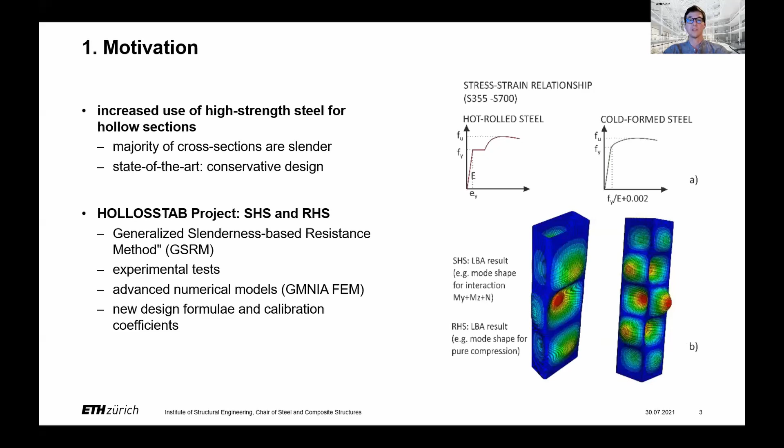as slender. Furthermore, most experts at the moment would agree that the state-of-the-art design formula according to the Eurocode for such cross-sections and high-strength materials combinations would be rather conservative and do not allow for utmost efficient and thus sustainable design. Before going into more detail, let's get some background on machine and deep learning.

So when does it make sense to use machine or deep learning in such a setting? I think that there have to be three necessary ingredients. One is that there has to be at least some pattern in the data for the effect we are searching for. We have data about the phenomenon, and the mathematics and theory is too complicated to capture it with a simple model. For the problem at hand, we would see that all three ingredients are fulfilled.

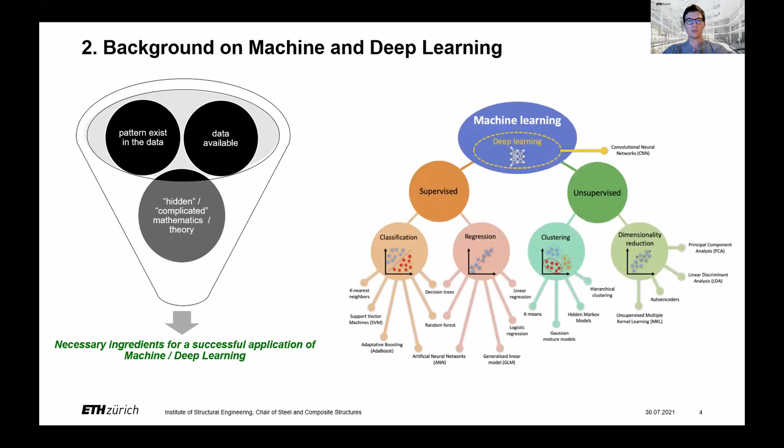As we are doing the prediction of a continuous variable, we would go into the branch of machine learning which is concerned with so-called supervised learning, as we have some inputs and some output variables. And as we are predicting a continuous variable, we would be in the branch of regression. And especially today, I want to present some results which we obtained for neural networks. And therefore, we are in what is called deep learning.

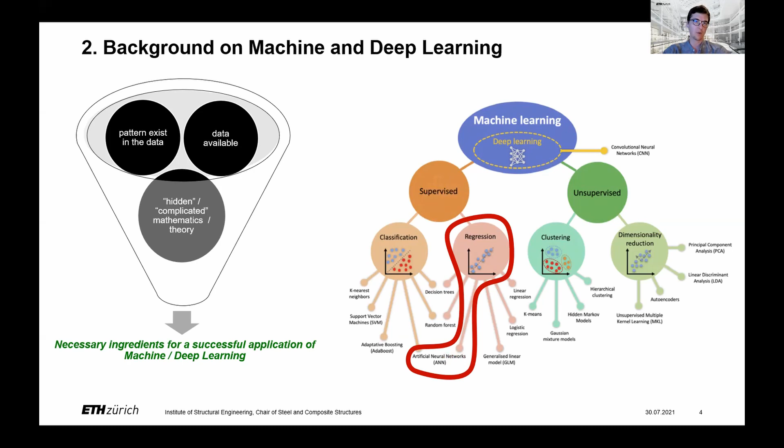So maybe one further note on the neural networks. As you can see, neural networks consist of at least three types of layers. The first one would be the input layer, which takes the features or input and hands it over to the so-called hidden layers, which, just as our brain, consist of some neurons, which take the signals from the layer before, process them in some nonlinear way, and hand them over to the next layer.

The third type of layer here is the so-called output layer or target layer, which consists of the variable which we want to predict in our case. So to sum up, a neural network is simply a composition of functions. Each neuron would take a weighted sum of the inputs from the previous layer, add a bias term, and put all that into a nonlinear activation function.

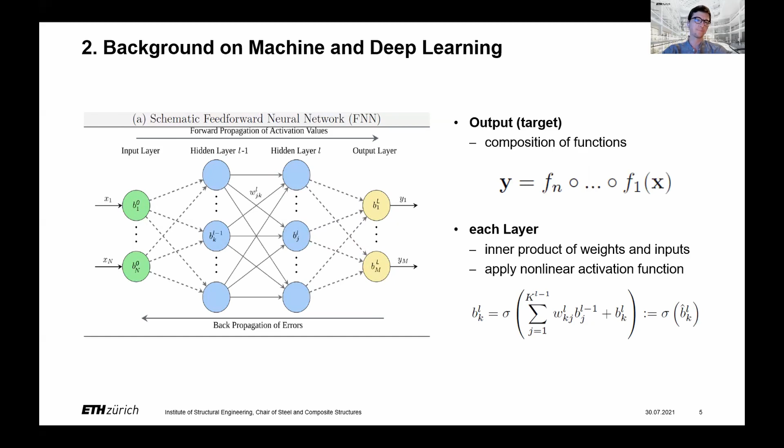So our database was generated based on experiments, but also finite element simulations within the HOLLOSSTAB project. And this serves as the basis for the validation of advanced numerical methods using geometrically and materially nonlinear finite element method analysis with imperfections, which in the following will be abbreviated GMNIA.

So in total, 104 full-scale tests on high-strength steels and mild steels on RHS and SHS and other custom-made sections with flat faces were conducted, plus a further 56 full-scale tests on HSS and mild steel CHS short members and beam columns were also carried out in a test facility in Munich.

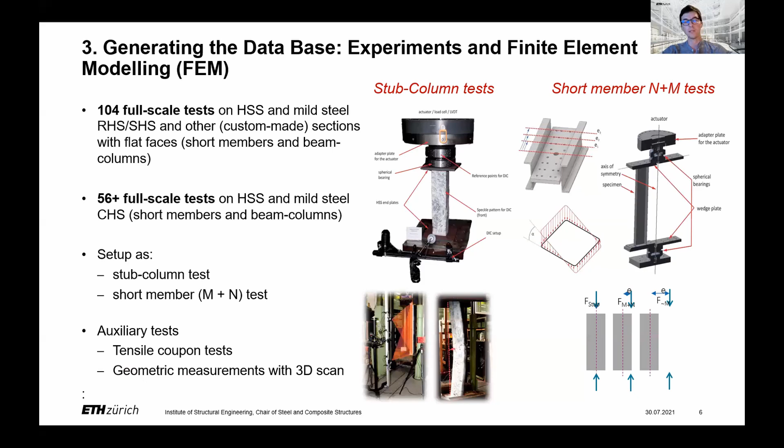The test setups were the stub column test, as you can see here on the left-hand side, and a short member test with bending and compression forces on the right-hand side. Some auxiliary tests were done on the material itself in terms of tensile coupon tests, but also some geometric measurements of the pre-deformed hollow section geometries before doing the tests. In addition to the physical tests, a bunch of numerical studies were conducted via the finite element method.

This consisted of two stages. In the first stage, there was a so-called GMNIA-MEAS, which used the measured deformed or imperfect geometry before conducting the test, and the finite element mesh was calibrated such that the peak load as well as the post-buckling deformation shape was met.

And then in the second step with the GMNIA, there were some simplifications with regards to the modeling of imperfections, but also material laws were applied. There are a lot of details on that end which I unfortunately have no time to go into. I would refer you to the papers of my colleagues, Dr. Toffolon and Professor Taras, in that respect.

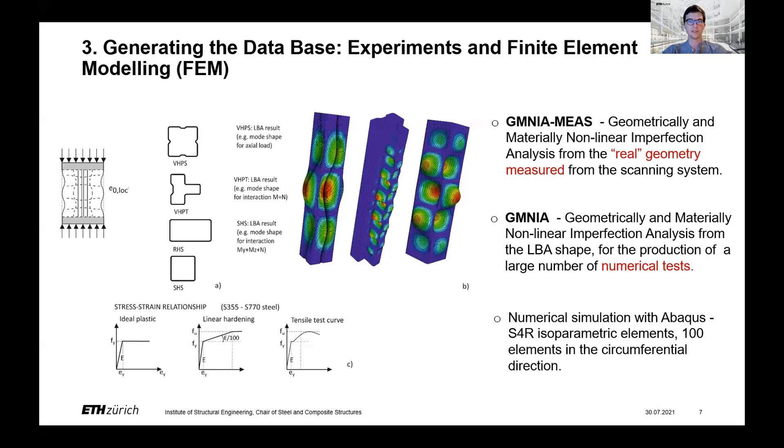Now, let's take the last 5 minutes to go a bit more into detail of the machine and deep learning modeling and calibration. And let's look at the model architecture. So we have in total 23 input features, which consist of the description of the geometry, but also the steel grade and the loading. We have one target, which is the ultimate load amplification factor, which we want to predict

given the 23 features. For the neural network architecture, I use 5 dense hidden layers with 150 nodes each. And I conducted a hyperparameter search where the activation functions ReLU and tangent hyperbolicus, but also a linear activation function were used. Furthermore, I use dropout regularization at rate lambda and a 5-fold cross-validation.

L2 norm regularization lambda is varied in steps from 10 to the power of -1 to 10 to the power of -6. I chose to use 300 update epochs for the training, and I normalized features together with the targets to the interval of 0 to 1. For the split of the training, validation, and test data, I used 70 to 20 to 10.

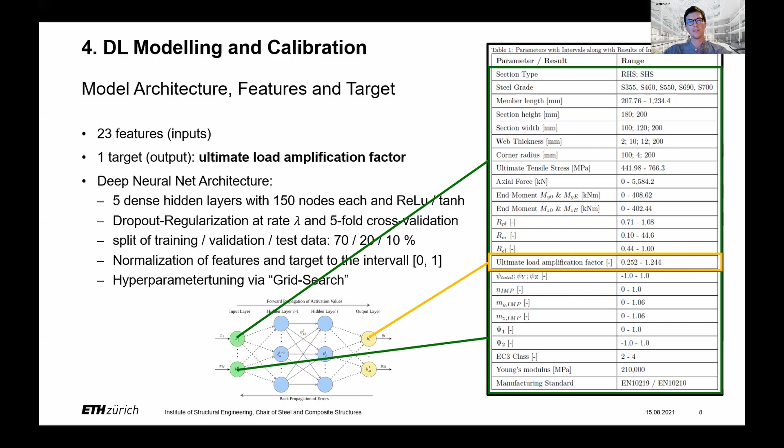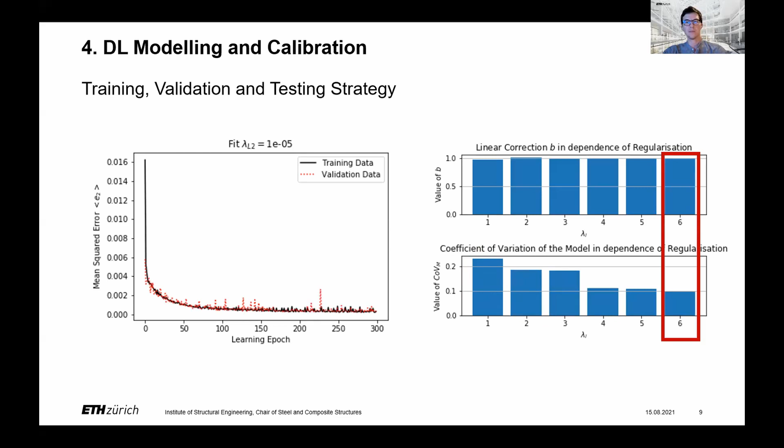So this furthermore implies that the model with the greater coefficient of variation of the error results in a greater partial safety factor here on the left-hand side. So for that reason, we chose the model with the smallest coefficient of variation. And with that, we go further

and investigated the determination of the design value of a resistance model given by that DNN. And we wanted to come up with a partial safety factor in accordance with Annex D of Eurocode 0. And I think this is the first time anybody did an analysis of a partial safety factor with an artificial

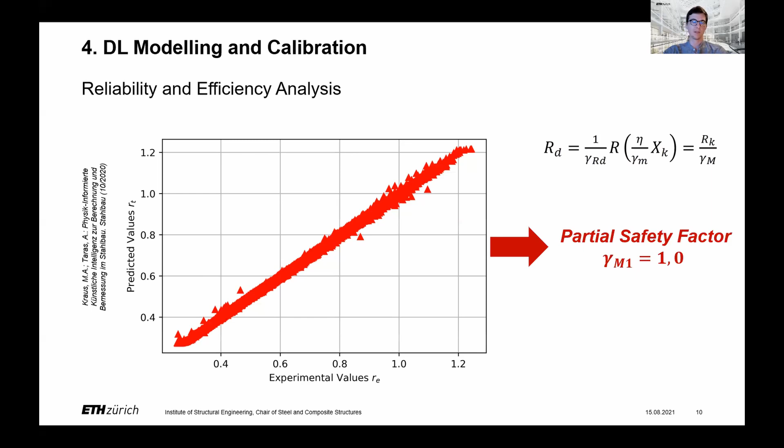intelligence algorithm. The computations of that partial safety factor show that the obtained deep neural network serves very well as a surrogate for the estimation of characteristic buckling loads of RHS and SHS steel profiles, and thus gives rise to a partial safety factor of gamma M equal to 1.0, which is very nice.

Finally, let me point to some efficiency analysis. So here on the left-hand side, you can see the results of the design of all the columns with respect to the current status quo of Eurocode 3. Here you can see a big scatter in design results, a lot of overestimating the material.

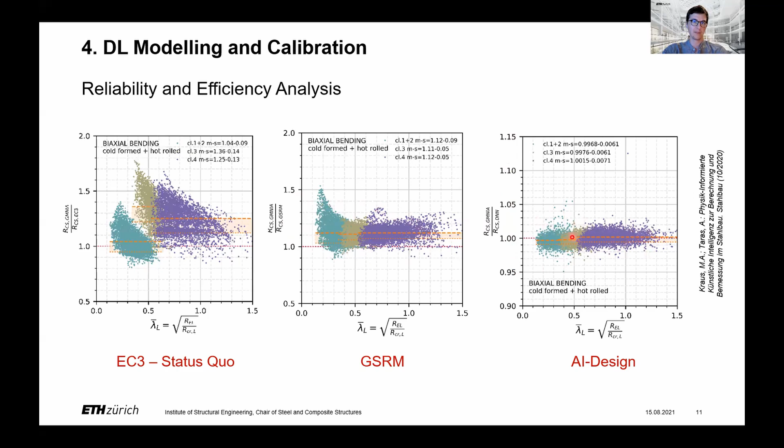With the generalized slenderness-based resistance method, you can see an improvement of that over-design over all cross-section classes. But finally, and in the end, the neural network is really capable of predicting the true buckling load to a very high accuracy. Okay, let's come to the summary and outlook.

We conducted a total of approximately 20,000 data points consisting of experimental and numerical investigations on the buckling loads of RHS and SHS hollow sections. Based on that, we calibrated several neural networks, investigated the performance of the neural networks by tuning the hyperparameters, and finally found a partial safety factor of 1.0.

I could show that our deep neural network-based prediction improves the performance by a significant amount. Therefore, we could provide improved design efficiency and sustainability by deep learning methods. In the future, the use of explainable AI methods is intended in order to investigate the contributions and importance of features in more detail.

And we want to understand the embedding of the features into the mechanical formula in more detail. Finally, further studies on deriving a neural network-induced design formula will be used in order to come up with a Eurocode-compatible format of the design in the future.

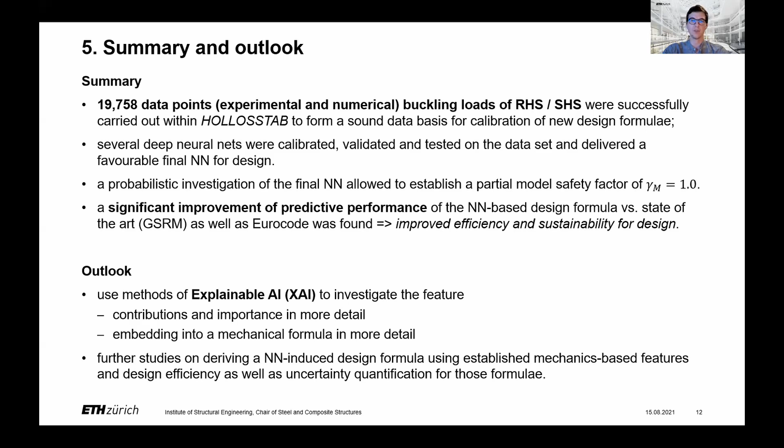Having said all that, I want to point your interest to the available literature on that topic.